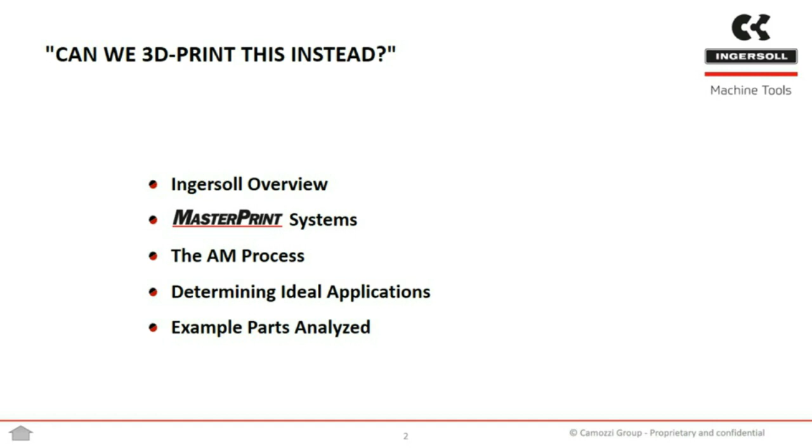So to start, we'll introduce Ingersoll Machine Tools. We're located just outside of O'Hare, just outside of Chicago, Illinois, in the United States. This is our main campus with an additive development center shown up top, but also long-standing production contract manufacturing centers, assembly for new machines and new equipment, engineering, and corporate headquarters, all under one campus, with some additional upcoming plant expansion.

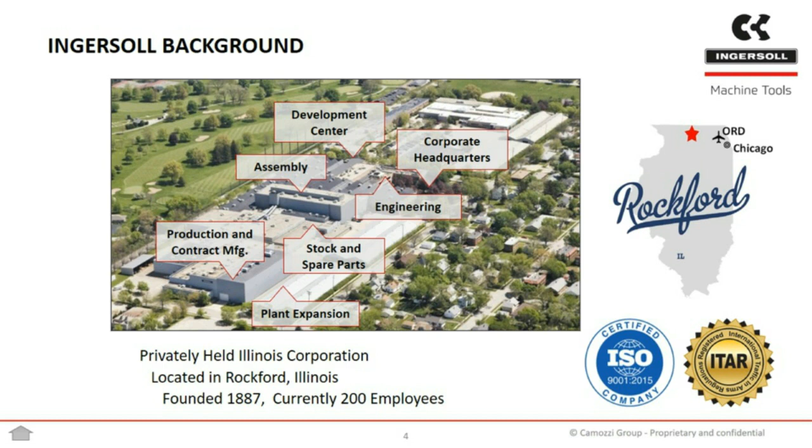Traditionally, we have over a century of machining expertise. Here are some examples of our in-house contract manufacturing - these are the size machines we're talking about when Ingersoll thinks large format additive. Using these platforms, these large machines range anywhere between 6 to 10 plus meters between gantry columns. You see the size of some of the machine operators there. Traditionally we've operated in the aerospace sector, mold making, aerostructures. In box 3, we see some traditional components of our own machinery that we're making on our contract capacity, and in slide 4, supporting the wind energy industries.

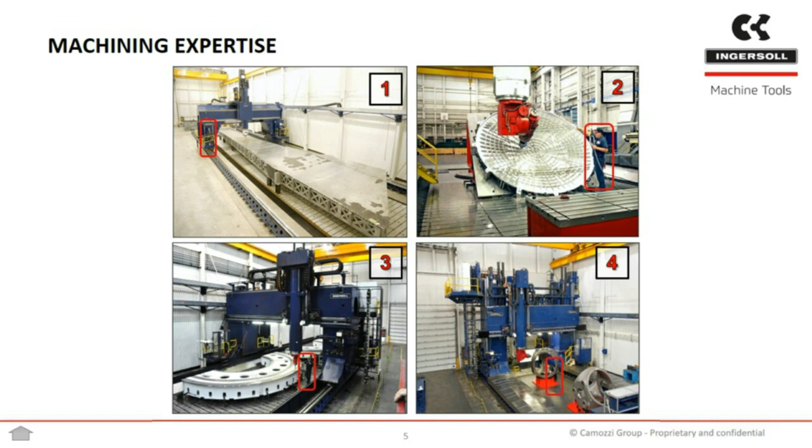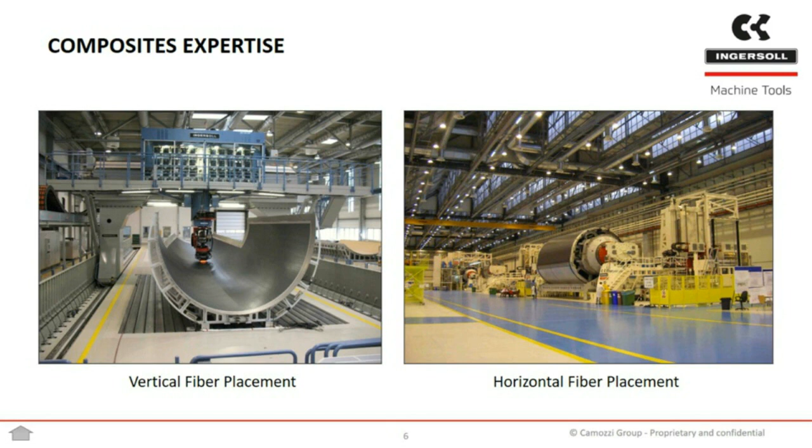We are also experts in composite manufacturing equipment, composite fabrication for aerostructures. On the left, we see a vertical format fiber placement machine. On the right, a horizontal fiber placement machine. These are laminating or laying up different layers or plies of composite material to make structures. An example of a composite machine that takes all of our technologies under one gantry or one roof is shown here, where we have automated fiber placement, tape laying, trim, and ply inspection or composite structure inspection systems, all modular, able to be picked up by the same gantry. In this case, it's the world's largest composite manufacturing gantry - 9 meters between columns, with additional travel outside of the columns, and 4 meters of Z-axis travel.

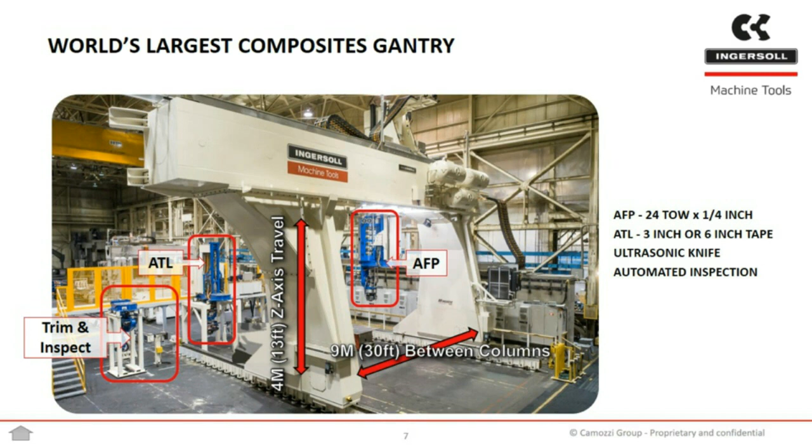This same modular format, where we're taking multiple technologies to a single positioner, can also be applied to a robotic platform, and we have recently done this at the Connecticut Center for Advanced Technology, to perform multiple manufacturing processes under the same platform.

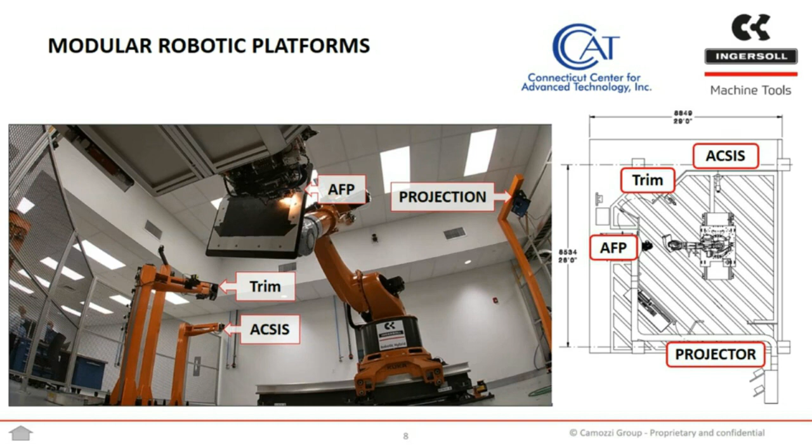In addition to the metal cutting and composites manufacturing capacities, we've also started a venture into 3D printing. Around 2016, we started a partnership with Oak Ridge National Lab, and now every day these case studies we're going to get to - these additive manufacturing processes - are being developed in our development center in Rockford, Illinois, where we've built a MasterPrint gantry for our own product development purposes.

These systems look like a pellet-fed single screw extruder. The parts are built in layers by multiple beads - you see in the center picture multiple layers of a 3D printed part sliced, and on the right you see individual beads laid down of extruded plastic. So it's pelletized thermoplastics fed to a screw extruder, and the extruder melts the plastic. For stability and strength, the plastic pellets are often pre-mixed with a chopped fiber reinforcement - it can be carbon fiber, glass fiber, or biofill like wood flour, flax, or bamboo.

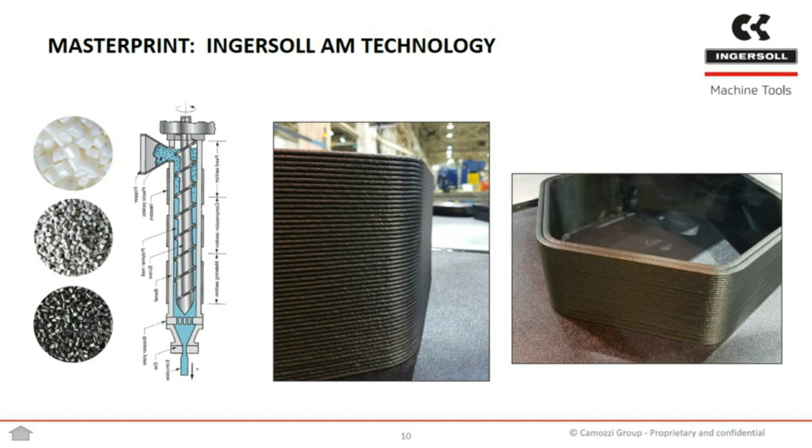This additional capacity of 3D printing has been added. This is an example of our development center machine in Rockford. And we are also adding an even larger machine at Innse Milano in Milan to develop the processes and advance the feasibility of these applications in support of the European market, European aerospace and defense industries.

This is our machine in Rockford. Very often, because of the large, say low resolution but high bead size of large format 3D printing, we not only have a printing module attached to the machine, but also a 5-axis machining head, a traditional machining spindle unit.

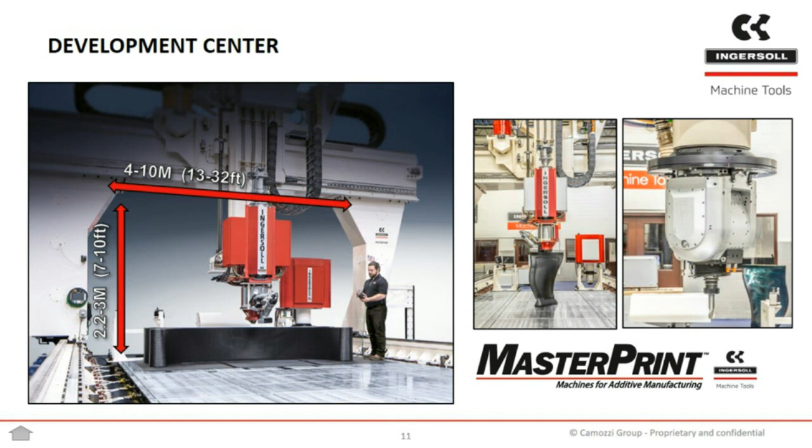So our machines are fairly modular in size, expandable along their length, with multiple interchangeable modules, and support an open material platform ranging anywhere from low temperature ABS and PLA to high temperature PEI, PESU applications, and again, often filled with some reinforcement for strength and stability.

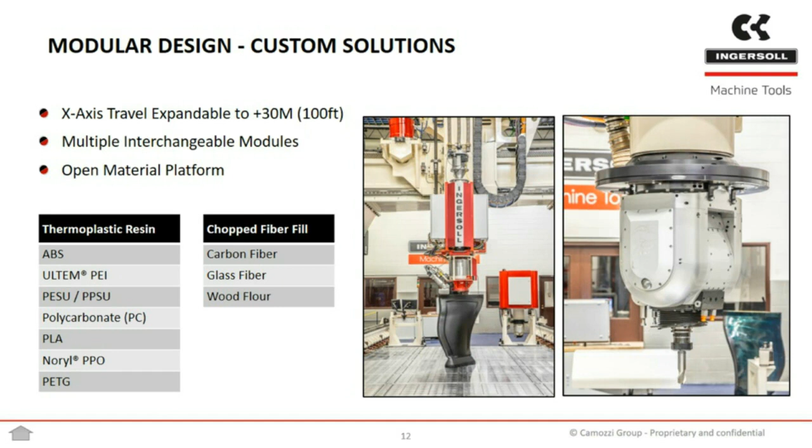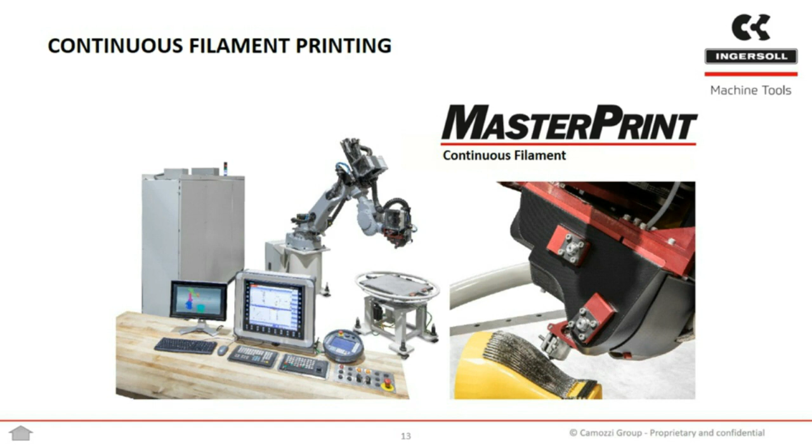We also have continuous filament 3D printing. I won't touch on these applications here, but this is more leveraging our experience from composite layup, from tow and tape layup, to drive a continuous filament as we print on top of parts or other more free-form contours. Here you see an up close view of printing on top of a printed tool, printing out of plane, or reinforcing existing parts.

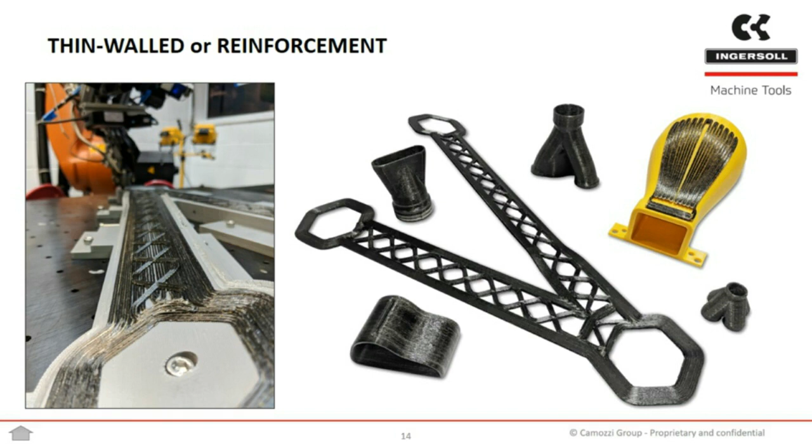This is happening as Ingersoll is part of the larger Camozzi Group in the manufacturing division, in the machine tool division, with the manufacturing division in Innse Milano receiving a MasterPrint machine to support Europe.

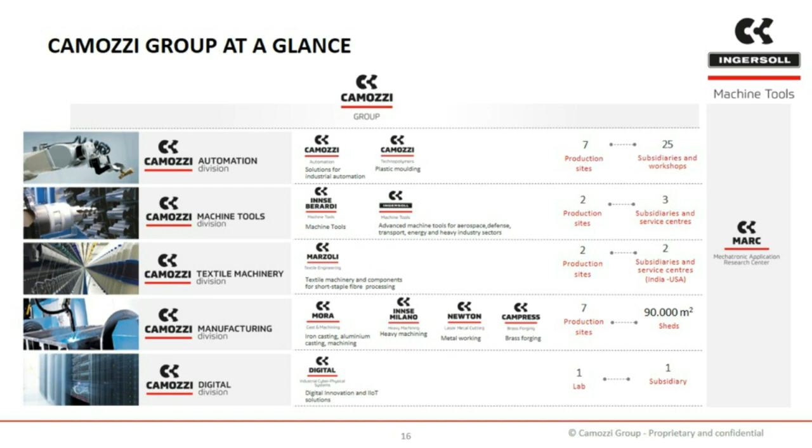I'd like to step through quickly the AM process and what it takes to run a manufacturing job for additive manufacturing.

We start with design for additive manufacturing, where the manufacturing or design engineer, as in traditional manufacturing processes, does best with some experience with the additive manufacturing process itself. So the design engineer is very much aware of what the machine is capable of, what the materials are capable of. Basically, the entire feasibility is best addressed at the onset, at the design of the part.

The path planning, or the CAM of CAD-CAM, in additive manufacturing's case is more generally described as slicing, where we are actually planning the machine motion that is used to print the part. That machine motion is then translated into G-code, preferably also simulated to confirm the motion is safe, reliable, and making a good part. This is also generally referred to as post-processing, where the CAM source code is processed into the actual G-code or NC code to go to the machine on the shop floor.

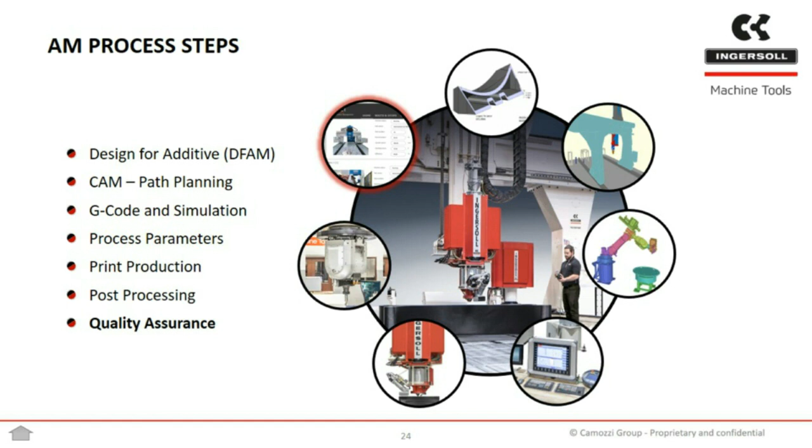So we'll talk now about some ideal applications, or what makes up an ideal application, and how we judge exactly why or if we should print a certain piece when we're asked.

So additive manufacturing as a technology is still maturing. Additive manufacturing in the factory is an even younger subsegment. And then again, large format additive manufacturing for industry is younger still. Because of this, I think it's helpful to apply the Gartner hype curve, which charts the expectations, or quote unquote hype, of an emerging technology over time, from a big bang disruption through the technology's maturity.

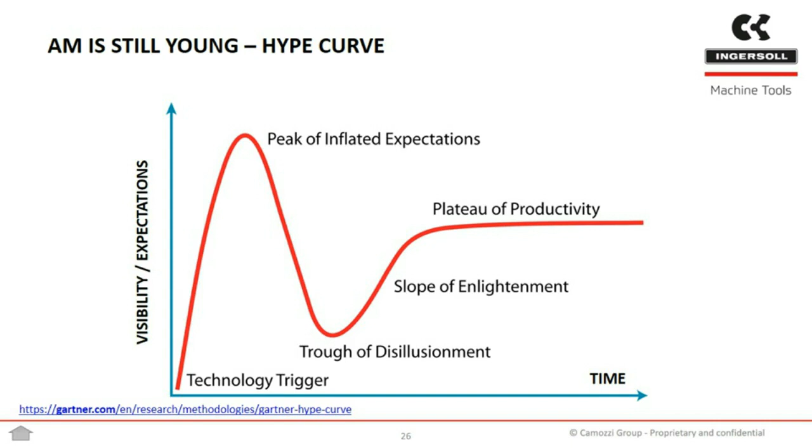I'd like to ask everybody, the audience, where we believe we are with additive manufacturing on this hype curve, from tech trigger to inflated expectations, through a trough of disillusionment, climbing out of it with some enlightenment towards stable productivity.

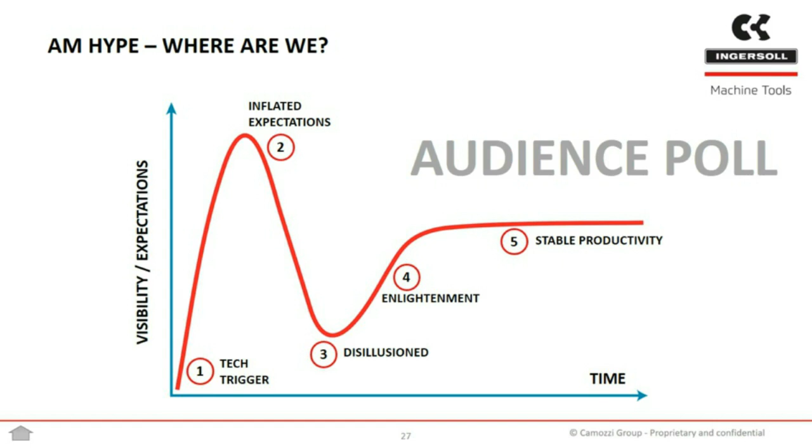As Curtis already mentioned, today's poll question and answers to it are: where is AM on the hype curve - tech trigger, inflated expectations, disillusioned, enlightenment, or stable productivity? While the audience is voting, Curtis, if I may ask, what results are you expecting on that one?

I am expecting the results actually to describe the audience. So depending on your answer, I'm expecting either more or less experience, or say more or less heartache or heartbreak in your past with additive manufacturing.

Thank you. Let's see the results. 13% of the audience members have voted tech trigger. 30.4% have voted inflated expectations. Another 13% have voted disillusioned. 39.1% enlightenment. And 4.3% stable productivity.

Great, thank everybody for your input. I think it shows that in most people's opinion, we are past our trigger of technology, or possibly some of those answers are even believing that we are very, very early on in the potential of the technology maturity. And then a large group under enlightenment is maybe showing that a lot of the audience has some experience with that heartache, where they have met the trough of disillusionment and seen some parts fail and some applications not be the right fit.

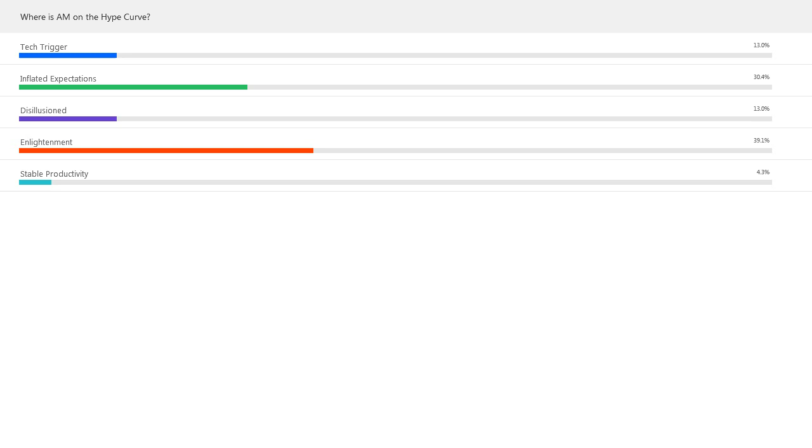I'd like to describe the hype curve in a little bit more detail from my own perspective, how I analyze where we are on the hype curve with this asymptote towards ideal adoption of a technology being exactly that. The plateau of productivity is the ideal adoption - it's where the expectations are matching with what the technology is capable of. And these two areas here, it's not that we want to be at the high peak, and it's not that it's bad to be at the low trough. It's actually that these two positions on the curve are fairly far from the ideal tech adoption, and that's what's bad about both of them.

Above that, at the peak, we are wasting resources with too high visibility and expectations than the technology is capable of, and underneath that, an opportunity cost of unrealized potential.

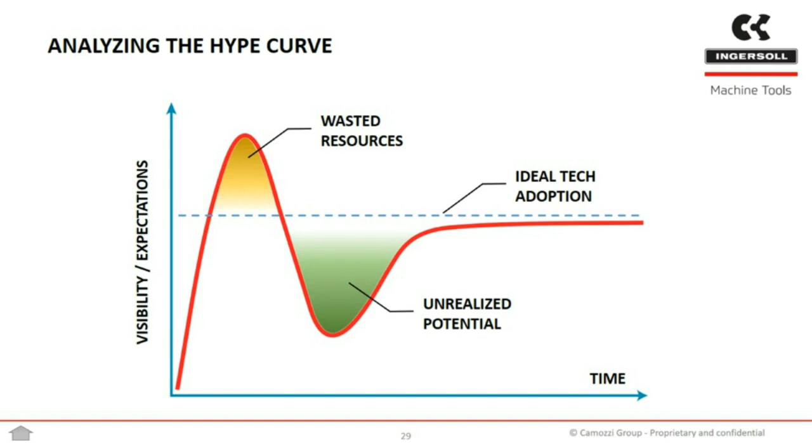And I would actually like to say that heavy industry is maybe more of an overdamped curve, where there is a much longer time to adoption of a new technology, usually dampened by established supply chains, lag in infrastructure, including IT infrastructure and also IT security concerns for new technology.

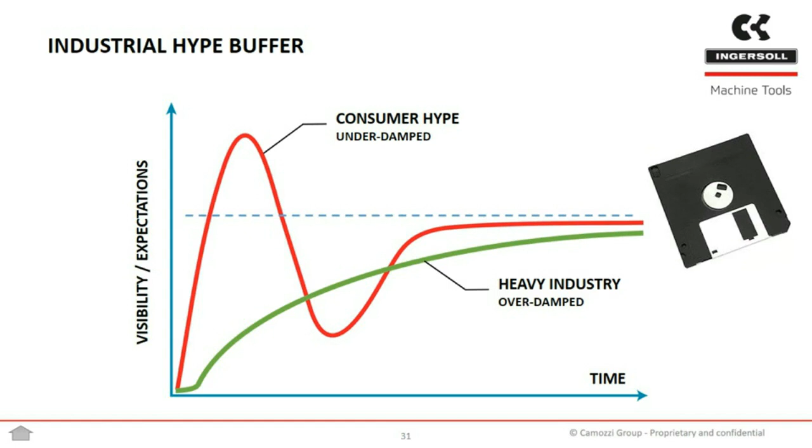I'd like to submit Exhibit A as evidence of this. If you've spent long enough time on a factory floor, you have likely seen one of these, a 3.5-inch floppy disk, not in use since probably Windows 95, but still available on today's factory floor. And when technology surpasses that, and we have much better technology to deal with something like data storage or data transfer, we still don't necessarily evolve - we evolve the devices to convert the floppy drive to USB.

So this is my evidence submission for heavy industry being a fairly overdamped hype curve, where we are generally fairly slow to new tech adoption.

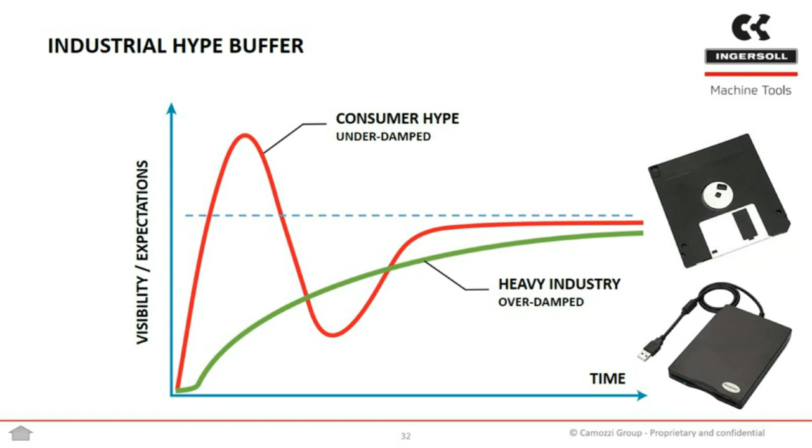So to judge the feasibility of an application, to try and critically damp that hype curve, to get to the ideal adoption as quickly and efficiently as possible, we should be very meticulously judging the feasibility of every potential application that is put in front of us.

We do that by some key performance indicators, by some metrics that I've outlined on the screen here. The first one being fairly heavy, because it is judging what we are competing against, whether we are competing against an exorbitant cost, a long lead time, or even the inability to create a part or some geometry, were it not for some of the enabling features or advantages of additive manufacturing.

So in the traditional cost or lead time category, we have either an enabling or a replacing - replacing even some exotic material, but also some highly skilled and hard to staff workforce through moderate fabrication. We may be just replacing some moderate or complex fabrication that takes a couple of parts, or some welding or some piece parts that need to be ordered special and then fabricated, towards what I would say is the highest difficulty to replace with additive, which would be a commercial off-the-shelf or some generic component, generally not suitable for 3D printing because they are already fairly well optimized with the advantages of commercial industry, with the advantages of economies of scale.

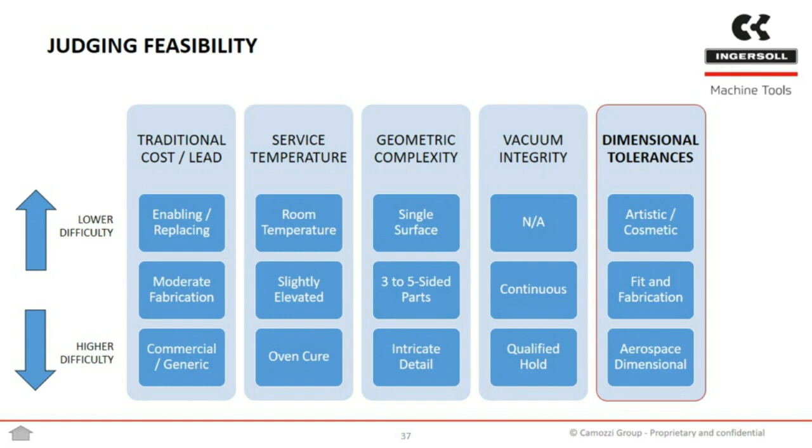So the old adage is when we want a fast, cheap, high quality part, you really only get to pick 2 of those. We're talking about basically at this highest difficulty level, the most difficult metric result in this category. The old adage is we get to pick 2: either fast, cheap, or high quality.

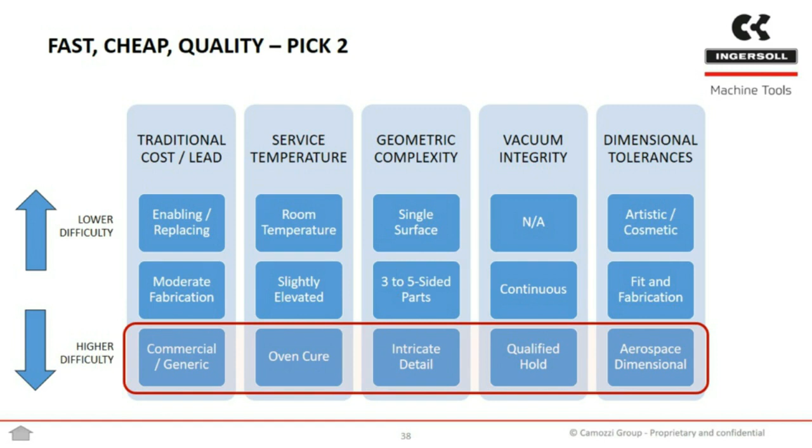The slightly more engineering approach is to create a decision matrix out of this. Here we have a max score of 15 being the most difficult. Maybe some of these categories don't apply or are very enabling, some of them might deserve a score of 0, but for these purposes we're going to score between 5 and 15, where 15 is the most difficult. Really, we are comparing, not necessarily drawing a hard score, but at the end we'll look at multiple applications and see how they rate compared to each other.

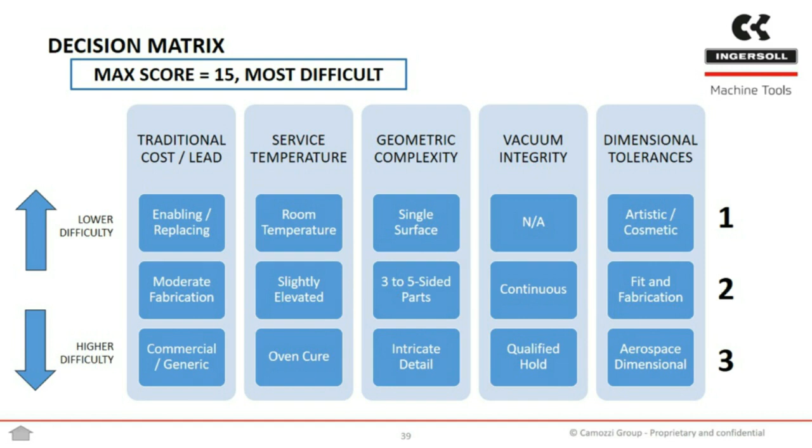So let's get through some example projects.

First to present is 2 projects in one. It's revolved around this nacelle fan cowl with a radius of approximately 1.3 meters shown here, and we are talking about both tooling for the yellow panel and the teal stringer forms.

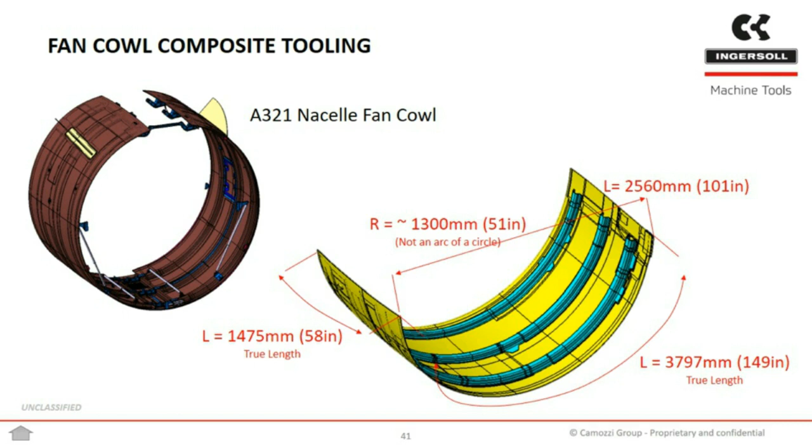This is a project that we've done, a successful print within 1 week. This is actually done on a robotic platform at Ingersoll.

The first application related to this job, or tool printed related to this job, is a layup tool, replacing the proof of concept or process development tooling before final engineering was approved or released, to have a tool for room temperature layup.

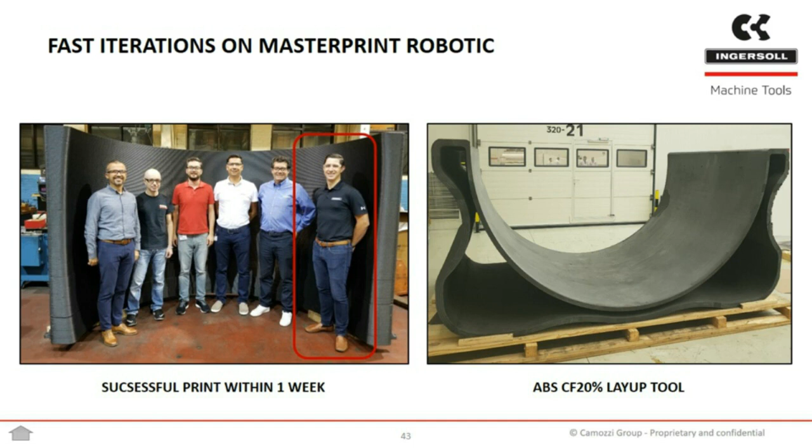So the fan cowl tool for panel layup is replacing fairly moderate fabrication at that size, some relatively dimensionally tight form factor that would need to be welded and then machined to final dimension at room temperature.

A single surface that we have to care about, where the back of the tool, the substructure, can be engineered to fit the printing process, not necessarily to fit the functional job of the tool. Not requiring any vacuum integrity, but requiring high dimensional accuracy to be able to judge the quality of the layup. This results in a score of 8.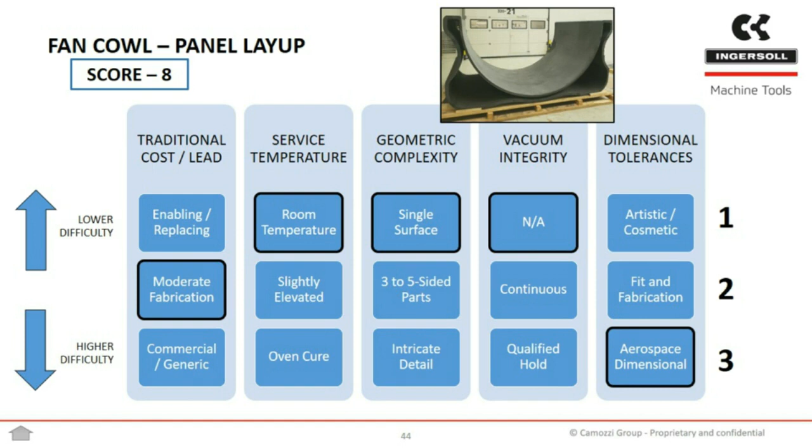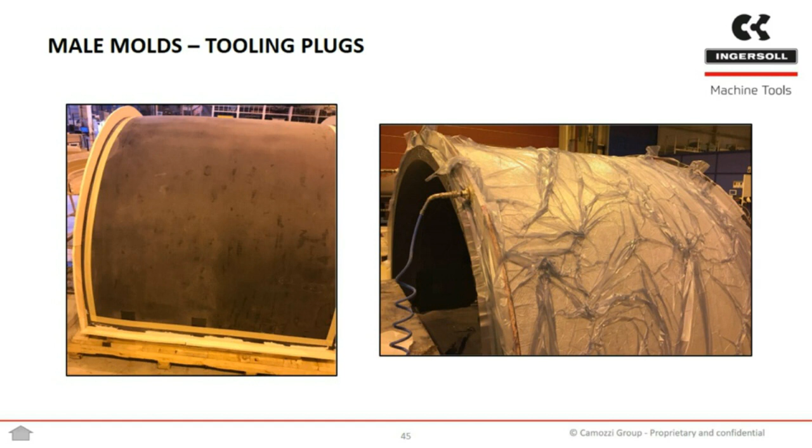The second application for the same job is tooling plugs. We printed a male version of that same panel tool to be used to produce carbon fiber tooling, CFRP tooling, for the production molds, the production layup, the production cure tools for that fan cowl panel, as well as the negative of the stringer tools.

These jobs supporting the fan cowl project CFRP plugs are again requiring, or replacing, a moderate fabrication, now at an elevated service temperature from the tooling material cure temperature.

Again, moderate geometric complexity, requiring at a minimum vacuum integrity to be continuous so that we can pull vacuum, even if a vacuum may need to be held with a continuous pump. And again, aerospace dimensional tolerances gives us a score of 11.

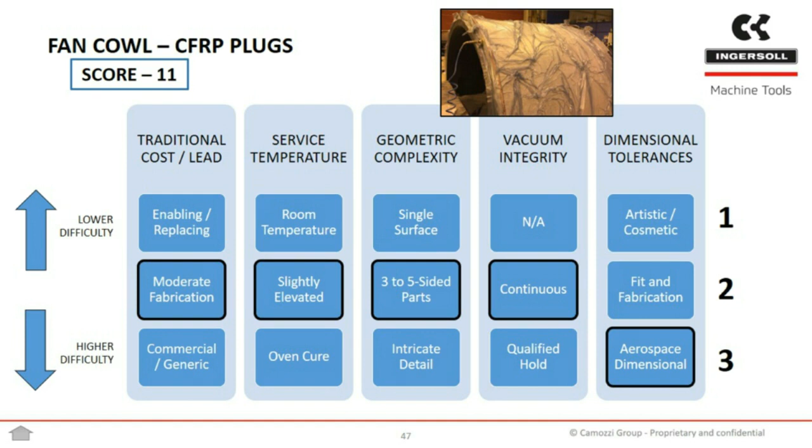Switching gears, there's another industry that might be interested in large format 3D printing. This project is scale testing for the marine industry. This part was printed in 2 pieces.

You'll see a picture and a video of the print in a second, but here we see the pieces as the split line has been machined. They've been assembled, both with pinned connection and bolted together, and then machined as an entire piece with the 5-axis milling head.

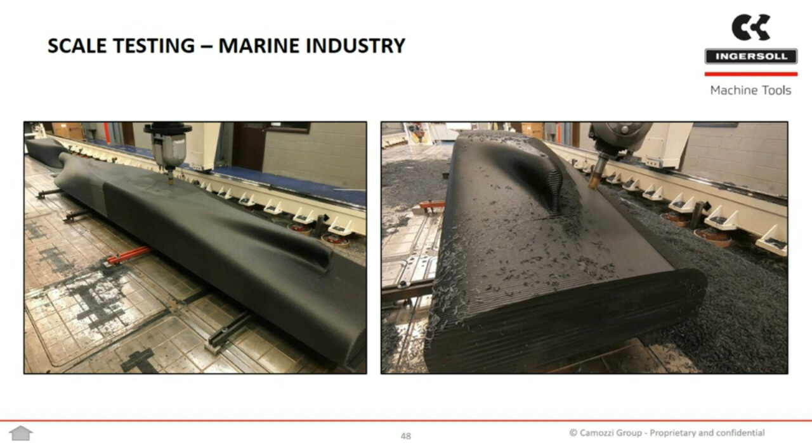Here we'll see a video of the parts being printed. You see them grow. This job was printed in 2 pieces. You see a third that we kept for ourselves. The extruder had the throughput, the machine had the capacity, and while we were printing, we printed a third for our own testing and as a showpiece.

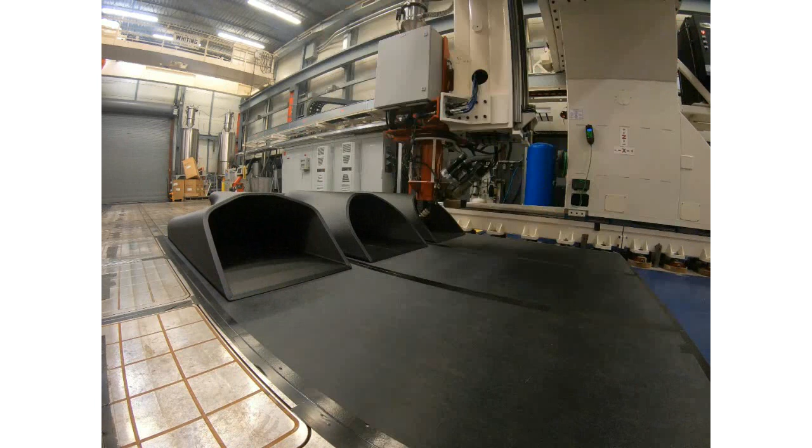This example you see is utilizing the 45-degree printing technology, where we're actually starting from the far bottom corner of a print and growing to the near top corner of a print, slicing the print at 45 degrees.

This, grouped into a category called the test tank model, is replacing moderate fabrication, being used at room temperature, a 3 to 5 sided part, so not fully encompassed. There was not a lot of tightly toleranced features on, call it, the deck of the boat, though it was machined for fit and access points.

But in reality, the form factor for hydrodynamic testing was a 5-sided part, not requiring vacuum integrity, and despite being a marine application, requiring aerospace dimensional tolerancing, also aerospace grade surface finish to get proper results from the hydrodynamic testing.

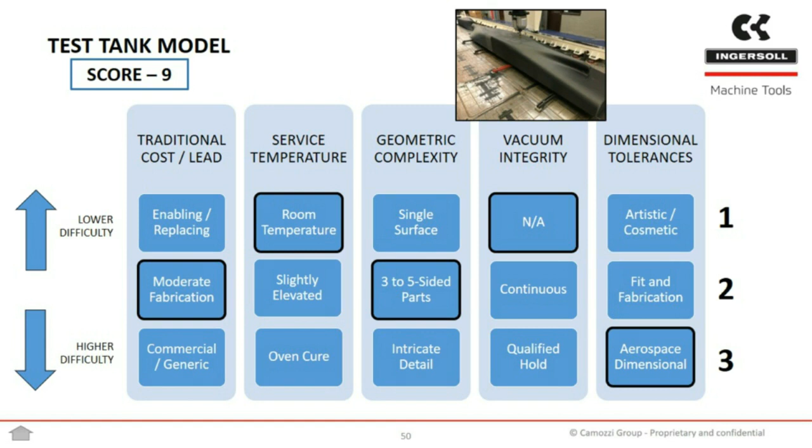Grouped together, we have smaller molds, both for carbon fiber and glass fiber vinyl ester for the automotive and marine industry. These are slightly smaller projects, easier to move and inspect by hand, oftentimes able to be laid up by hand or even sealed by hand.

In this case, the differentiating factor is that we are usually replacing not an exotic metal weldment, less intricate fabrication, but more so a foam tooling block, a high density foam that is glued up or epoxied up into a certain stock shape and then machined. So there are different advantages and disadvantages to this family of applications.

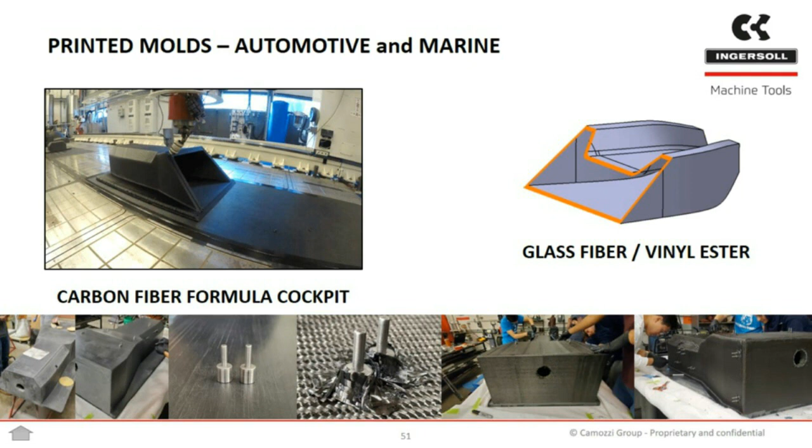So in this case, we are replacing moderate fabrication, that it would still require a machine tool if we're coming from the tooling block family of replacing that as a traditional manufacturing method. At a slightly elevated service temperature, mainly seeing the exotherm of the epoxy cure process, or possibly a low temperature pre-cure for high temperature freestanding post-cure where the tool is not involved.

With 3 to 5 sided geometric complexity, again, usually some surface being on, call it the base plate or the tooling plate that is untouched. Not requiring vacuum integrity, again, because these smaller parts for these industries can often be finished with a fairly intensive mold sealant.

And then dimensional tolerances, depending on the application. In these applications, they were less intensive, so falling into category 2, slightly closer to fit and fabrication tolerances. Not that they didn't need to be machined, or that they could be sort of eyeballed or tape measured, still requiring an NC machine, but more on the line of needed to be functional, but could be pushed into place at final assembly.

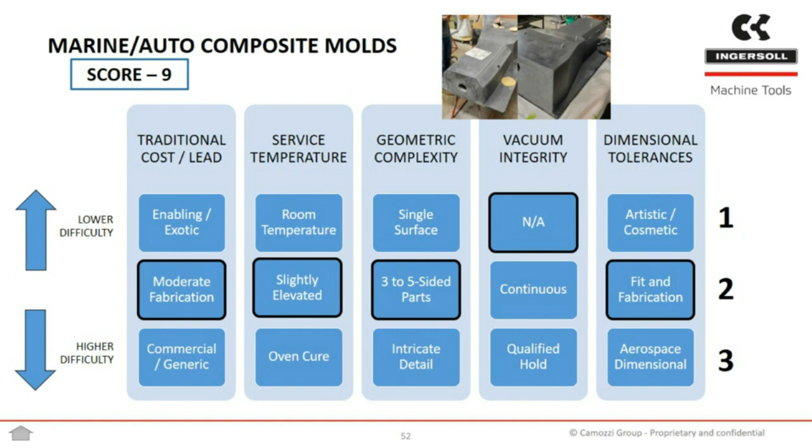Getting on to a much more intensive application, here we have a cure mold for the aerospace industry. In this case is a winglet layup tool. We have a winglet of a jet, and we have that aerospace form factor with a plethora of tooling ball locations, multiple scribe lines, some fairly intricate geometry when we get towards some of the tight curvatures in the mold. And you see it here being printed in the vertical format.

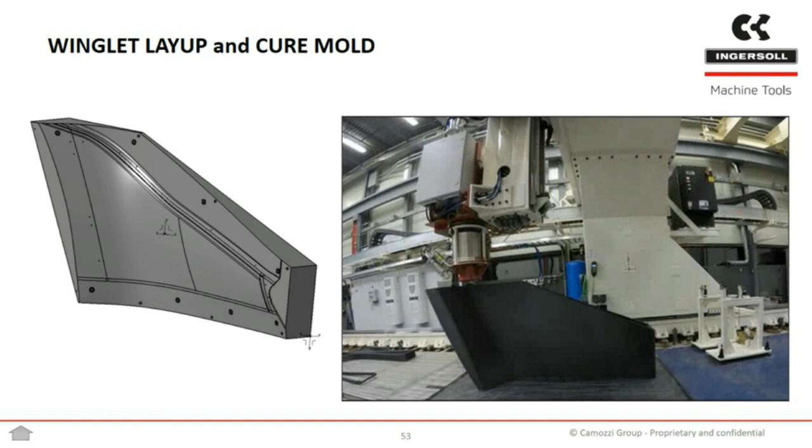So with a straight nozzle being printed directly as height off of the print bed. This is replacing moderate fabrication, needing to withstand an oven cure, aerospace composite cure tools, a 3 to 5 sided part where we have the composite laminate that needs to escape the mold, so there's some opening.

Needing to withstand or perform at the highest level of vacuum integrity, and again, aerospace dimensional tolerances. This gets up there as far as stringent, as far as a very high demand application.

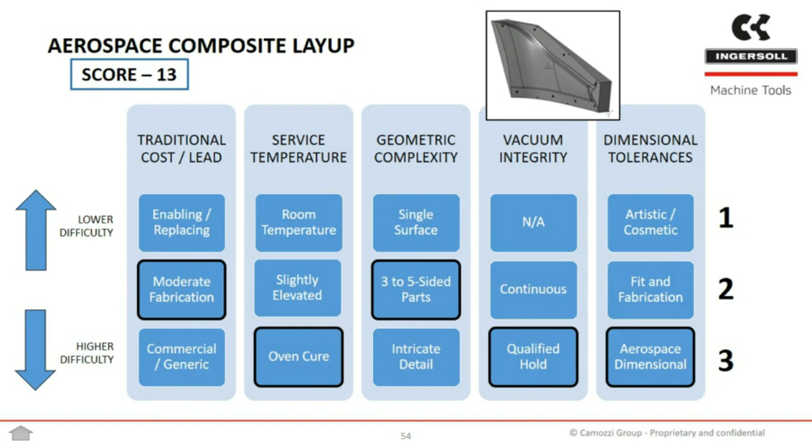Here we're showing a bridge girder mold. The application was for concrete casting. This is very large, 3D printed, again printed at the 45-degree slicing, 23 feet long, and this is a concrete casting.

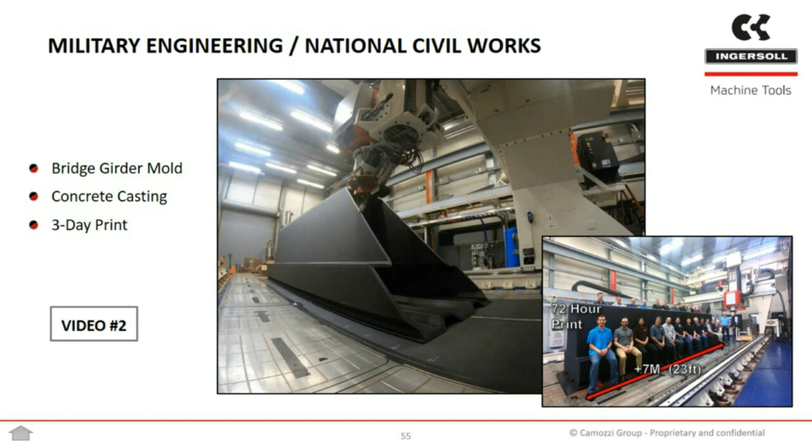We have a video showing the print in our development center in Rockford, and after the back wall is formed and until the end cap is put on, is a lot of repeat motion, basically the exact same layer again and again for the middle 2 days, let's call it.

So these concrete forms are replacing precision carpentry. It's moderate fabrication happening at room temperature, still requiring machining for final form, still trying to get as close to near net even with the concrete casting process. Not requiring vacuum integrity, we can seal the mold otherwise manually, and not requiring the most stringent of dimensional tolerances.

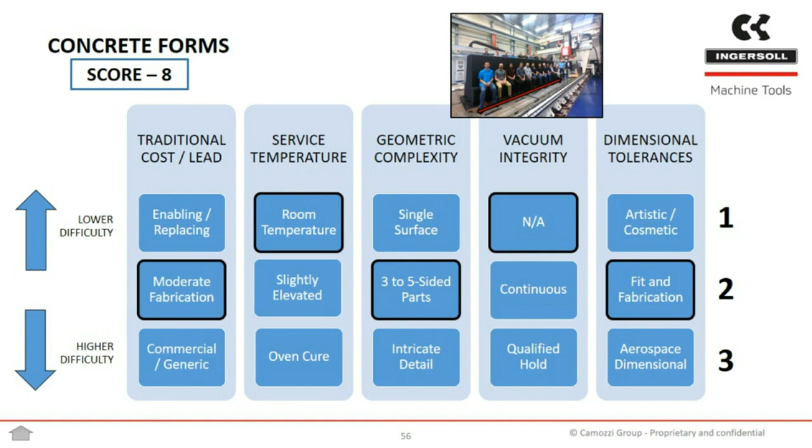The final category involves two applications that were printed on a machine at the University of Maine that was commissioned over the last year. This is a slightly larger machine than our Rockford Development Center, about 6.7 meters between columns, 18 meters of length, and enabling a 3-meter Z-axis stroke for 3D printing.

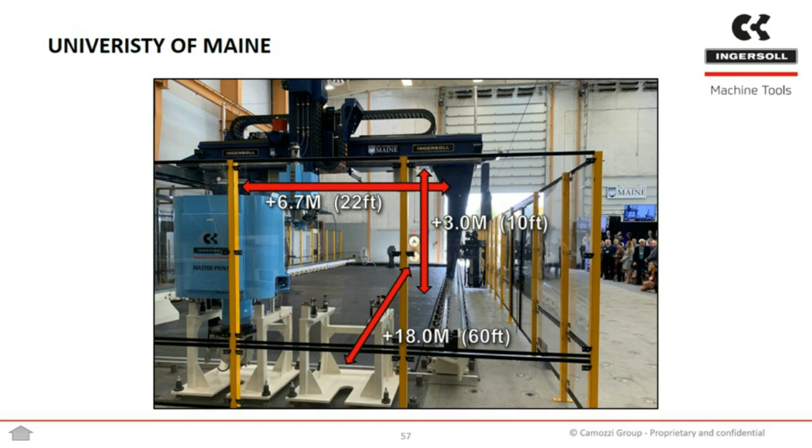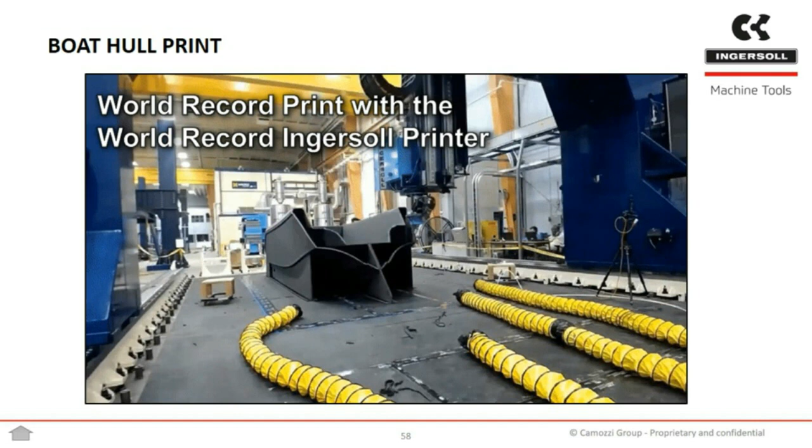With this, we printed an example boat hull. This is a world record print with the world record Ingersoll printer, certified by Guinness. This is the object that was printed. The University of Maine has a test tank where they can fabricate waves and wind patterns above that, so it floated in their tank.

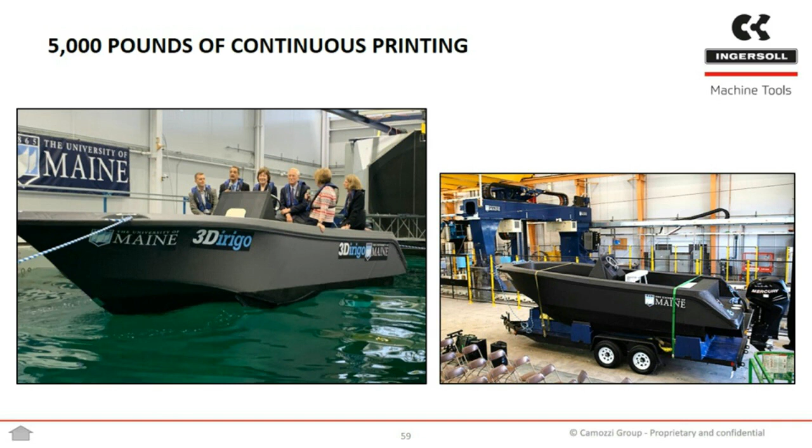We trailered it and attached a motor to it. This was a demonstration piece, a full final part, but used as a demonstration. Same with this.

Demonstration piece that was a soldier shelter system, for lightweight, rapidly deployable structures that can be mobile, shown here on the back of a truck. A standard shape on the outside, customizable for usage on the inside, printed as a demonstration for the United States Army Combat Capabilities Development Command.

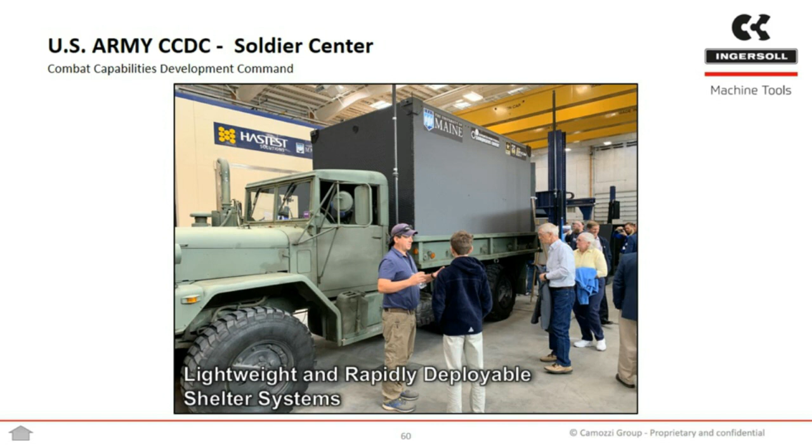These fall into a category called structural demonstrations, where the part needs to function, but in this phase is more so a demonstration. They are head turners. This gets a low score in the traditional cost / lead category, because they are serving their purpose specifically because they were 3D printed. They are enabling something, or replacing a traditional form of manufacture entirely, doing so very rapidly, and their purpose is to show what's possible.

Being used at room temperature with varying degrees of geometric complexity, but oftentimes down the middle, where we are utilizing but not pushing or violating the capabilities of geometries that can be 3D printed. Not requiring vacuum integrity, and the dimensional tolerances can again vary between the artistic or cosmetic—just needs to look good—to needing to do something, or at minimum serve some functional purpose in category 2.

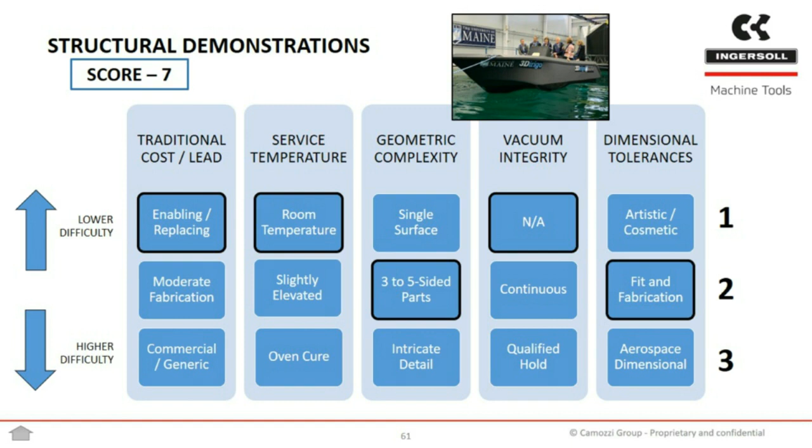To recap all of these from start to finish: we have production trials, and the difference between production trials and tooling plugs is a significant score gap where the parts need to start performing at temperature and under vacuum. We have a group of slightly lower performing, easier to validate, higher feasibility applications.

In the marine models and concrete forms, these still need to do a significant job, generally at room temperature, generally without a need to pull vacuum. The highest scoring, most intensive application requires the most experience, attention to detail, first time right mentality—carbon fiber cure tools, which need to perform at high temperature, hold vacuum, and be dimensionally accurate. It's a plethora of hurdles to overcome there.

And finally, structural demonstrations, which if it's something that will gain attention, expand the imagination, test the applications of large format 3D printing, but is still mainly purposed as a demonstration, that is ready to go with a low score, high feasibility for a good print job to select.

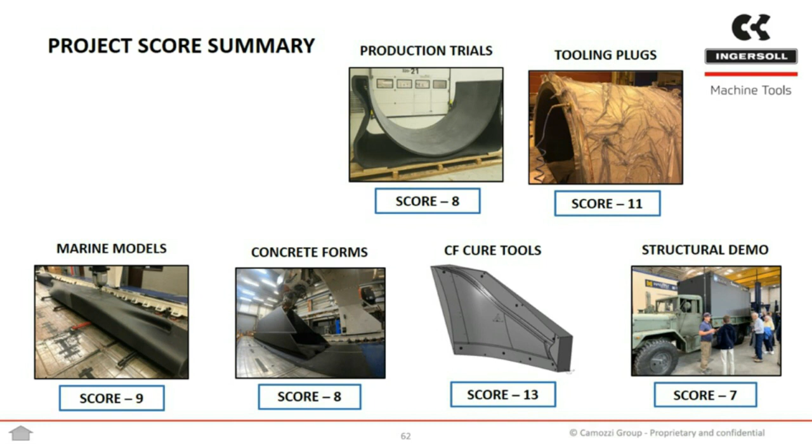Across all of these projects, we see some common advantages and disadvantages of 3D printing—a group of pros and cons. Pros being that we have a rapid response to issues, being able to make prototypes early and produce late. A lot of times just-in-time production isn't planned as just-in-time, it's happening as just-in-time because it needs to. But it allows prototyping of aero surfaces or other tooling to be done before, or even while there's still high risk of engineering change.

It captures the entire manufacturing process in a digital process where small changes are easily repeated. So a small change to a part or family of parts that has been proven and tested, once we've printed one of them, it's very easy to make a small change and print it again without going back to the drawing board for designing the process or proving out the materials.

It allows for customized production, like digital manufacturing allows—a lot of unique parts or unique part numbers, maybe in the same family, can be printed for not a lot of added manufacturing cost and lead time. And at certain times it enables geometry. I'll also talk about how at certain times it restricts geometry. There are only certain things that can and can't be printed. Some things can only be printed; some things can't be printed at all.

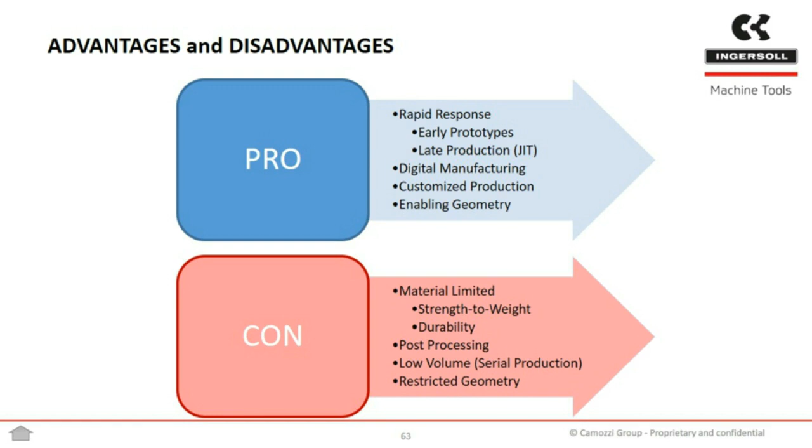Near net shape fabrication and internal voids, that's exactly what additive manufacturing excels at, and is very difficult for traditional manufacturing, if not impossible. Versus some tight tolerance to flatness, very, very round holes, very high quality surface finish. These are easy for traditional manufacturing, and they're some of the highest hurdles to jump for additive manufacturing.

So all in all, the additive manufacturing process enables rapid development. We have in-stock materials, we can make quick design iterations, we can do testing of partial prints, partial parts, scale them down very easily, and then scale them back up when the process is proven.

And that's because it is a digital manufacturing process where the machine is doing the casting and the finishing. So this helps us jump that gap, that divide on the shop floor between we have a concept and we ran it through the computers, we've simulated it, it should work.

To okay, we have something to play with. We've gotten something in front of the engineers on the shop floor. We have some tooling where we can actually start making a part. And it may not be as durable or as efficient as the long-standing production part to make 1,000 units, but it will help you iterate as quickly as possible.

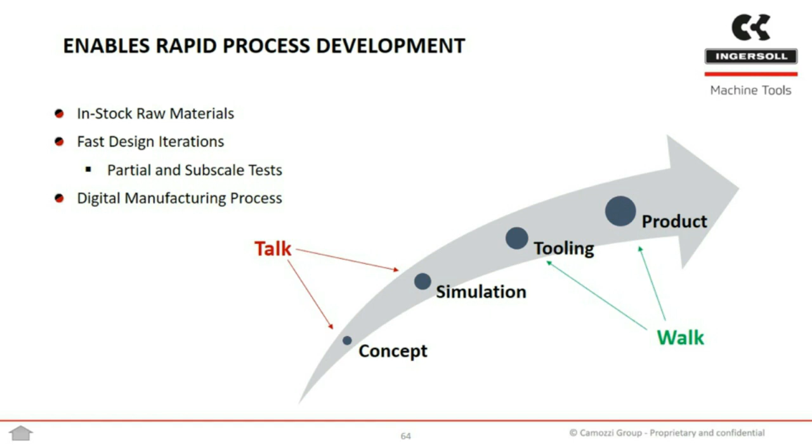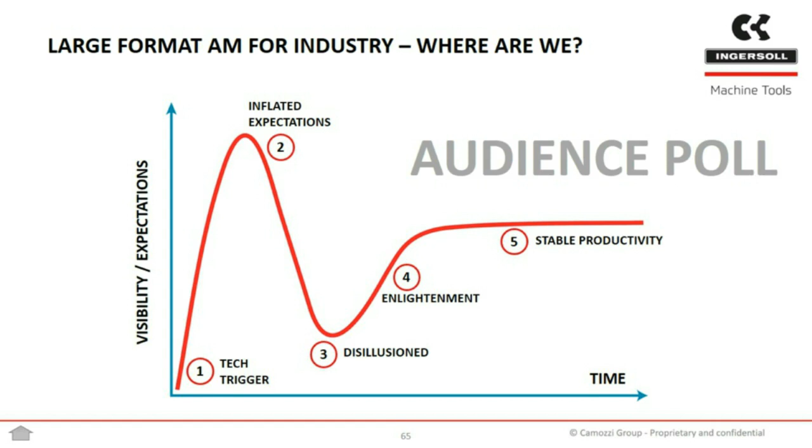So a final poll now I'd like to ask very specifically to large format additive manufacturing for industry. Where are we on this hype curve? Please vote between tech trigger, inflated expectations, disillusioned, enlightenment, or stable productivity. Again, if I may ask, what results are you expecting on this one?

Sure, yeah, I'm expecting... Again, I don't want to guide the results before they're in, but I am expecting, after specifically calling out large format additive manufacturing, maybe to see a little bit more dispersion towards enlightenment, or even some weighting towards the disillusioned, as I've highlighted both the advantages and disadvantages and how some of these applications are still progressing.

Thank you very much. Let's see the results. So 7.1% have voted tech trigger, 21.4% inflated expectations, 3.6% have voted disillusioned, 60.7% have voted enlightenment, and 7.1% stable productivity.

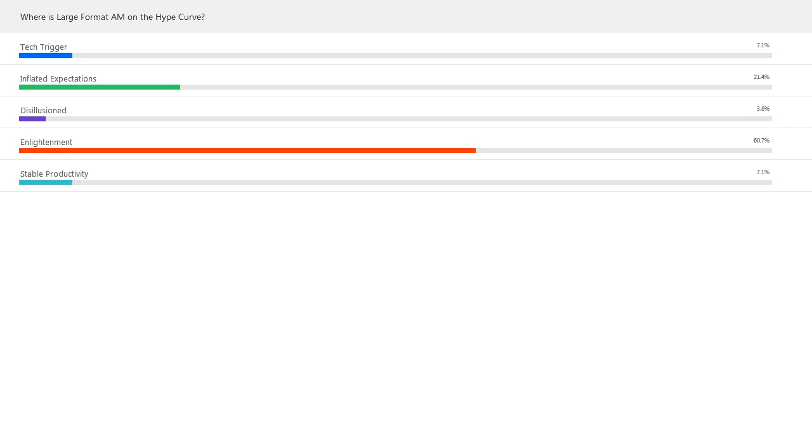Great, yeah, so I'd like to call out where I think some of these applications fit, first particularly talking about different markets. So to wrap it up, I'd like to say I think that some of the consumer products are still climbing towards the peak, so printing for the consumer.

And we see, I'll say ourselves, or at least the topic of this presentation, large format end use parts are maybe still progressing out of the peak, or still receiving a lot of hype. I think some structural components are still maturing, as a lot of applications are being formed out of the results of the just for show demonstrations.

So a lot of the just for show demonstrations are weeding out what is good and what is bad for AM for end use parts or for structural parts. I believe that cure tools still need to find their niche. I think it lies in leveraging the specific advantages of additive manufacturing that we've outlined, and that means custom geometry, requiring digital manufacturing, requiring a quick response time. And I think it will likely end up being geared more towards R&D and repair jobs.

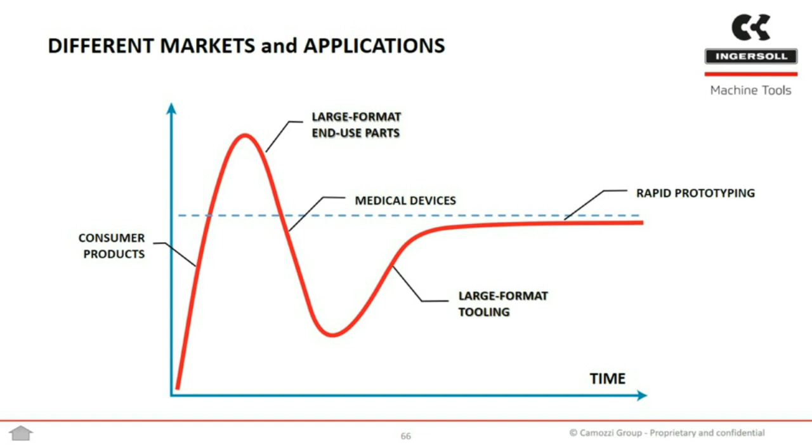Specifically shown here are now these large format applications where we have structural components still receiving a lot of attention and, as I said, being weeded out by the large format demonstrations. Cure tools requiring some leveraging still to be done, specifically based on their advantages. This may end up being particular to short-run jobs,

R&D, maintenance and repair operations for composite skins, and the maturity of cure tools needs to be facilitated by, or I would say even the maturity of all of these large format applications would need to be facilitated by a hardened production support system. So a shop floor that's familiar with the additive process and how to handle and deal with printed parts, and also a reliable control of the printing equipment in order to eliminate lost time and in order to have fewer failed prints, a higher probability for first time right applications, so that additive can truly capitalize on its advantages of low cost and short lead time.